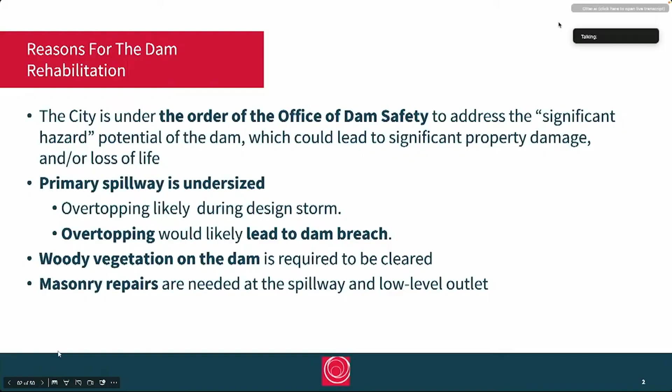I wanted to provide an overview of the dam. It's on Dexter Road—a good chunk of the road is actually the dam. It's an earth embankment dam, about 200 feet long. There's a primary spillway made of a concrete weir with a concrete overflow section that sends water underneath the bridge crossing Dexter Road.

The structure has a concrete core wall in the middle intended to help reduce seepage through the dam. There are also two low-level outlet pipes, 24-inch diameter, that can be used to help drain the pond, usually for maintenance operations.

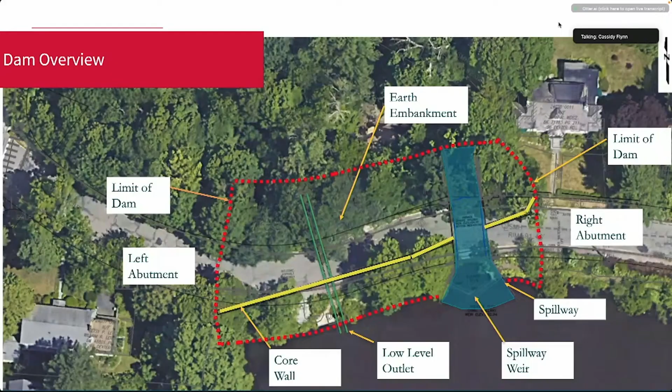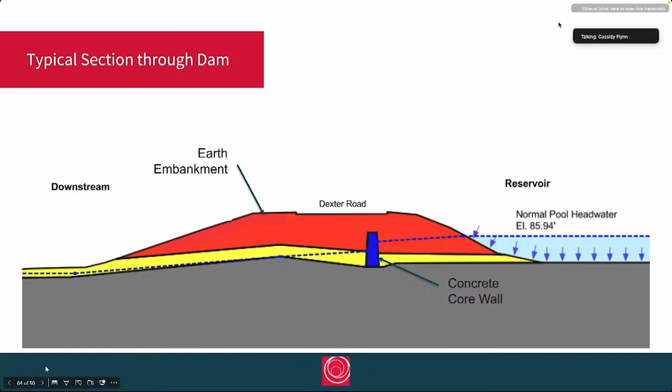It's a cross section through the dam. On the right side is the reservoir, the pond upstream. Most of the dam is the earth embankment section. And then there's that concrete core wall represented in blue, which sits down on top of the bedrock.

And you can see schematically there, it sort of reduces the water that's seeping through the dam. The dam is classified as a significant hazard potential dam. And the state requires that it be able to pass the spillway design flood, which would equal a 100-year storm event.

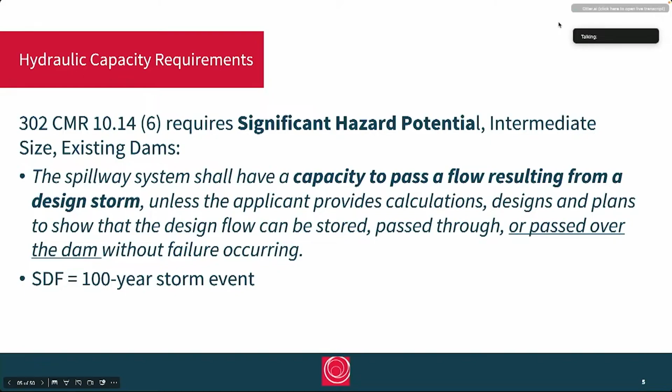We've done a fair amount of looking at the dam evaluations, including starting with hydraulics. We wanted to independently evaluate the hydraulic capacity of the dam. We've developed a hydraulic model to look at how much rainfall we get in the area, how that hits the ground, how it runs into the pond. That's impacted by things like the slope of the surfaces, the type of surfaces, whether or not they're pervious to absorb some of that water or impervious, which would make that water run a little faster. So all of those things get incorporated into our hydraulic model.

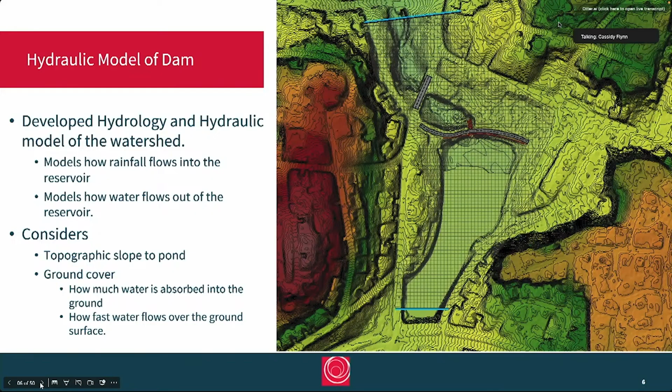The 100-year rainfall based on the data set that's out there is an 8.8-inch rainfall event, which would occur over a 24-hour period of time. That's the requirement the state would have us design this to.

We ran two different models. One was a one-dimensional model, and the second is a two-dimensional model that looks at the topography in more detail. We ran those. The 1D model is a simpler one, and the 2D gets a little more complicated. But in the end, they both showed about the same thing.

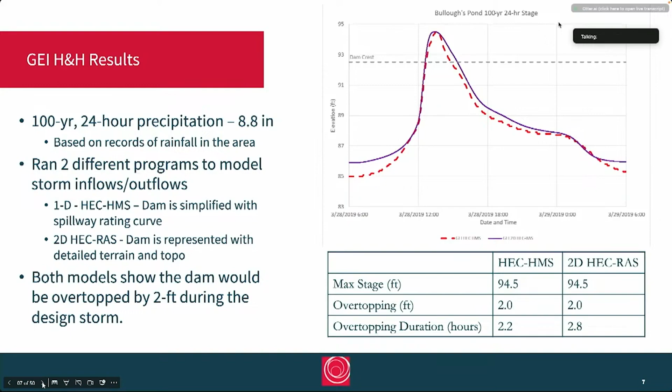So when it overtops, that's a failure mode that we're really concerned with. That's an overtopping failure leading to a breach of a dam, which is really the most frequent cause of a dam failure for earth embankment structures.

So what happens, water comes over the dam, you can see in the top image. Once it starts to come over, if we don't have any hardening of the structure or erosion protection, it starts to move soil particles. The more it moves the soil particles, the more it starts to move more, and it eventually erodes back to reaching the full reservoir upstream.

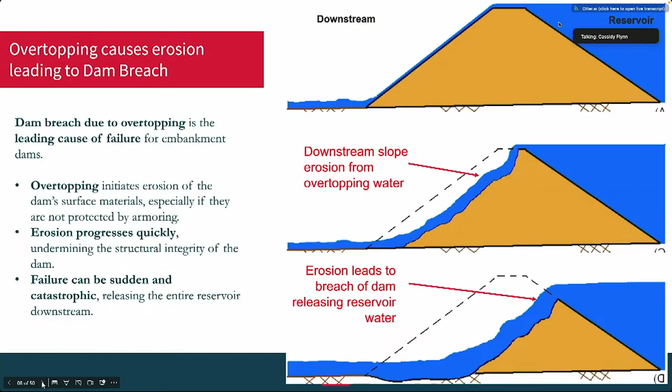And then what happens is we lose the full reservoir. So inclusive then of the water overtopping the dam, we pick up all the water that's in the reservoir that wants to go downstream as well.

So as we went through an alternative evaluation process, our primary goals were to look at: can we increase reservoir storage to help retain this flood? Are there ways we can increase the spillway capacity so we can send more down so the dam itself doesn't overtop? And then lastly, if it does overtop, what are our options to try to resist the erosion and not allow us to breach the dam with an overtopping event that would reach the reservoir?

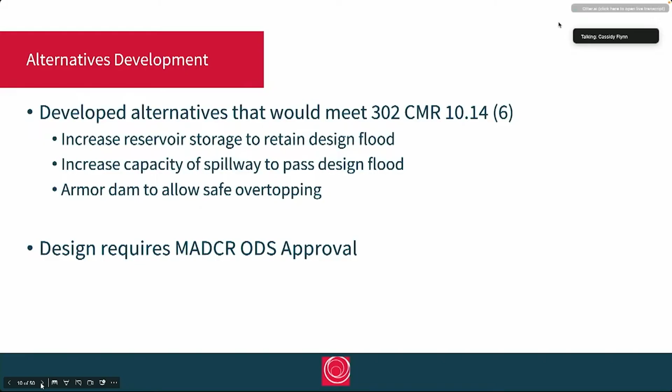With all the alternatives we considered, we did have to keep in mind that at the end, the Office of Dam Safety is going to have to approve any proposed repair. We would have to submit a Chapter 253 dam safety permit, which gives them really the final say to review and agree with the project.

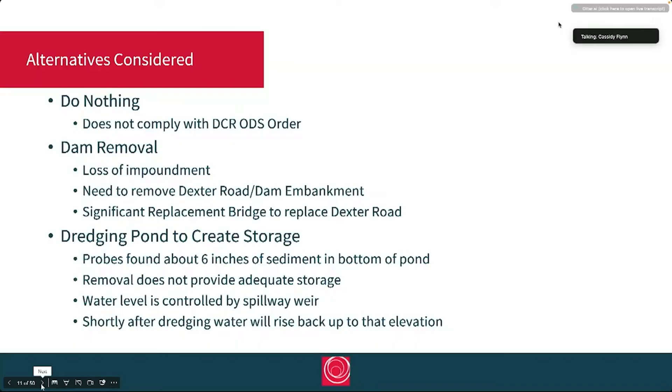We looked at potentially dredging the pond. We did some probing and found there was maybe about 6 inches of sediment. Removing the sediment doesn't really help us pass the design flood. As we take that sediment out, the water level would drop about 6 inches, but there's water always feeding into the pond, and that level is controlled by the weir. So within a few weeks, a month maybe, the water level would be back at the same level, and when the spillway design flood were to happen, we wouldn't have any extra capacity at that point.

We looked at trying to modify, could we use the low level outlets? The Office of Dam Safety doesn't allow manual operations of the low level outlets as an active way to deal with a storm event. They want a passive system that doesn't require human intervention. We talked about potentially preemptively draining the pond in the event of floods, but again they don't accept that as a solution because over time, people stop doing it, so it doesn't work effectively in the long term.

And then we looked at, are there other ways to add different types of low level outlets? The challenge here really is the size of the system needed to pass the flood is significant, and we didn't think it was very viable.

We considered, is there a way to add an auxiliary spillway, another way to get the water around the structure, but due to the site constraints that was going to be a real challenge. There's not a lot of property around, and property taking would be needed for that expansion of the dam footprint. Not very viable.

We considered, could we enlarge the primary spillway? Can we get more flow through that? We looked at whether we could add a larger weir, the length of opening in the spillway where water can flow over. There's a couple ways to do that: one is widening it up into the reservoir, another is using a labyrinth spillway, which has more length and a smaller footprint.

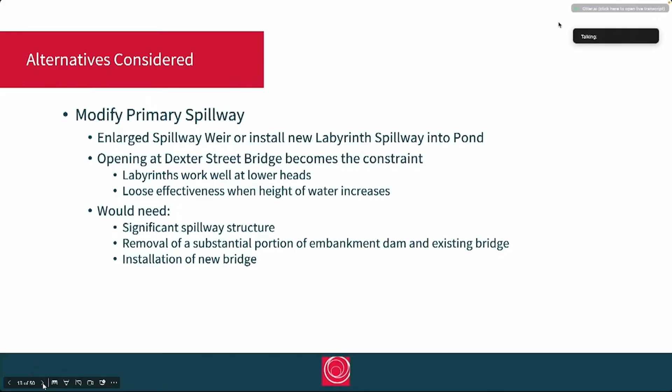So then we came back to the alternatives of reinforcing the dam, so in the event it does overtop, we wouldn't have erosion on the downstream side and wouldn't ultimately cause a potential breach of the dam. There are a few solutions we considered for ways to do that.

Originally we tried to do it in a way we could argue the downstream slope wasn't part of the dam anymore, to keep the trees, but the Office of Dam Safety didn't accept that in our discussions with them. So we have one solution, a sheet pile wall. The second solution is a modified core wall. A third solution is an overtopping protection design. I've got more slides on those, so we'll talk a little more in a few minutes.

And then lastly, we considered whether we could raise the height of the dam to hold back more water. That was challenging with the site constraints. We currently have about 2 to 3 feet of overtopping predicted, so we'd need to raise the dam at least that much.

But once you raise it, the water level goes up because the water keeps rising. At the current elevation only 3 feet of water goes over, but then it relieves itself because it's going over the dam. The more you raise the dam, the more you're trapping water instead of relieving it, so you end up chasing it. I'm estimating we'd have to raise it between 4 and potentially 8 feet, which really impacts the surrounding streets. A number of houses right on the pond would also be impacted with flooding, and adjacent properties on the intersecting streets would need access modifications considered.

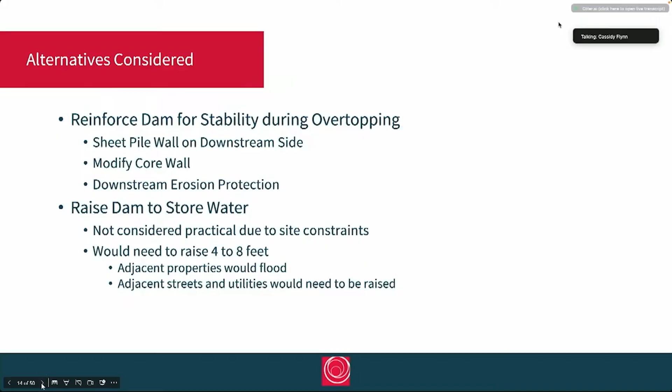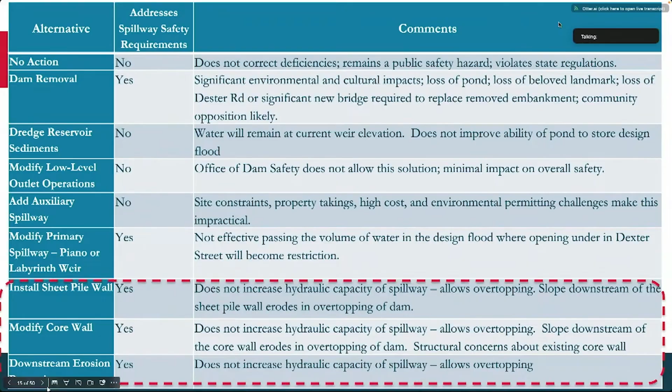We'll go through the embedded sheet pile wall, raising the core wall, and a downstream overtopping slope protection project. We've discussed each with the Office of Dam Safety, and they've indicated they would review any of those options as potentially viable. They'd want more detail and want us to demonstrate how these would be stable during and after an event. In our discussion with them, my feedback was that a couple would be more challenging to prove good stability, but we'll go through those.

The sheet pile gets driven into the ground. It could be cut off so it's buried and you don't see it, and then we'd restore the ground at the top. We'd have to put in these dead man anchors to provide lateral stability to the wall if it has to serve in the capacity we're looking at.

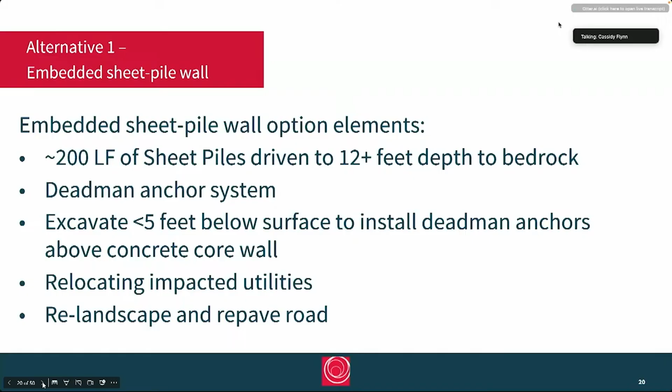The second option we came up with was the raised core wall alternative. It's similar to the sheet pile solution in that we're using it essentially to stop erosion that might happen during the overtopping event at a certain point in the dam, so we don't breach into the full reservoir.

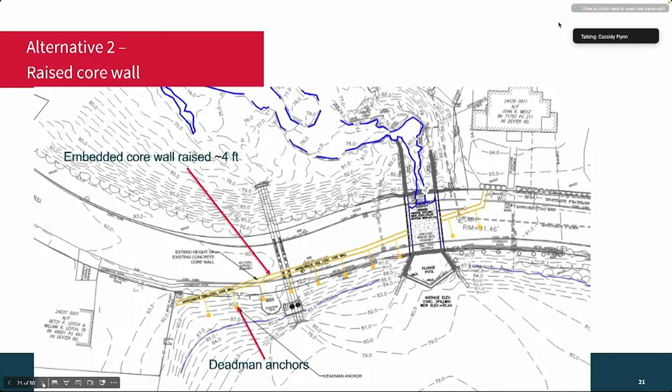That existing core wall, which we believe is unreinforced concrete buried now for about 100 years — if we could extend that, we'd need to make a structural connection into it, extend it higher, and also add a lateral restraint like the dead man system to help.

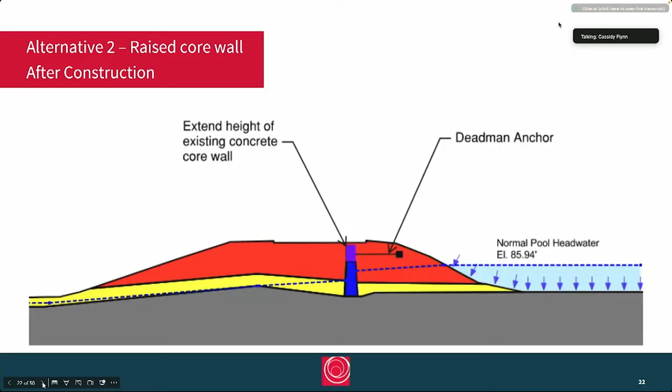That would allow all the material on the downstream side to erode and come back, stopping when it hits the core wall. Then the core wall, for some period of time, essentially becomes the downstream side supporting the dam and the water in the reservoir.

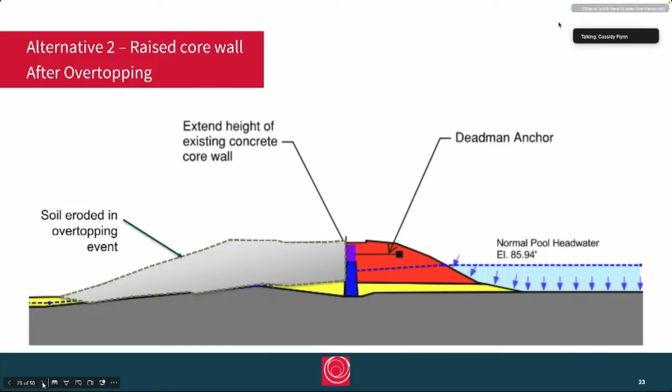This one excavates 5 feet down to the top of the core wall. We need to anchor into it, form concrete up around it, and dig for the deadman system. We will have utility relocation issues and landscape issues to restore.

I think the biggest unknown and uncertainty at this point is the condition of the core wall that's been buried for 100 years. It wasn't designed originally to act as a structural element, so we need to make it one. The risk is if we get out there during construction and find it's not in good condition, where the pivot would be to a much bigger excavation and really a brand new concrete wall.

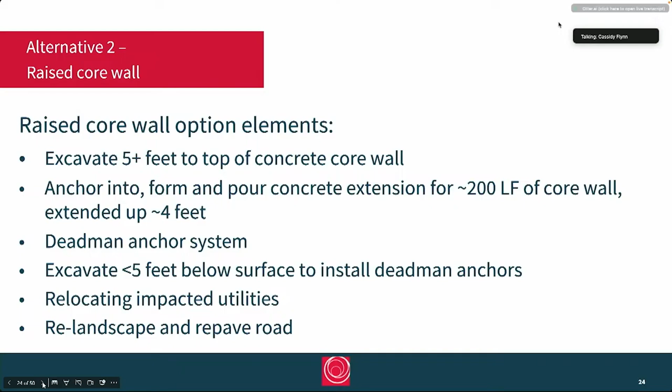Lastly, of these three alternatives, we evaluated downstream slope protection using an articulated concrete block system that can be covered with turf and grass. So that's what you see when you're out there.

This is a much easier excavation. We're really just disturbing the downstream slope of the dam. We'd put down some base materials and then lay these articulated concrete blocks, which I have pictures of in a minute. As the water overtops the dam, we have potential erosion of the topsoil above the articulated concrete block, but we stop the erosion way out on the downstream side of the dam versus the other two alternatives we just talked about.

This one has tree removal like the other two. We've got to strip and put in some of these articulated concrete blocks and fills to give us a nice leveling surface. Once those are in place, we'd cover them with topsoil and seeding.

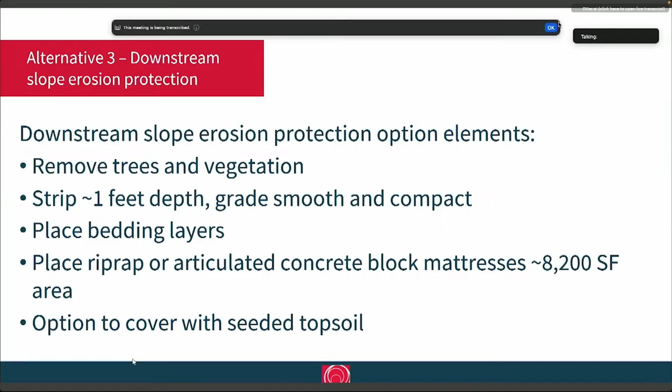Another example of one that was constructed. At the end, you see the concrete blocks on the left image, and on the right image is after they've put topsoil and seed over the top of them, so you don't see them underneath the ground.

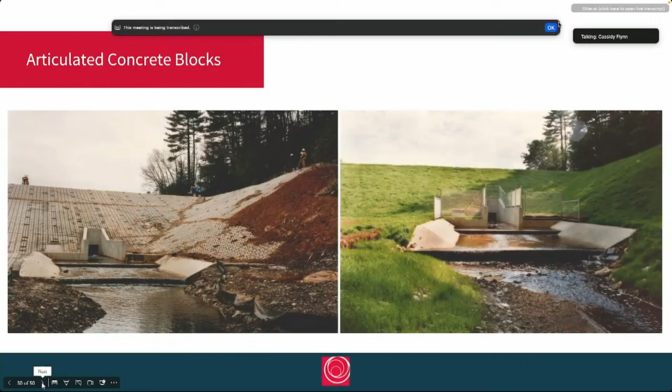We've talked a little bit about overtopping and breaching, so I want to go through those for a minute. On the left, you see the start of an overtopping event, with water starting to come up and over the dam. Overtopping itself, if we can protect the dam from eroding, we're letting the water pass over, which it currently would do in its current condition. Our estimate right now is that we'd have about 400 cubic feet per second overtopping the dam in both the current condition and our proposed solution.

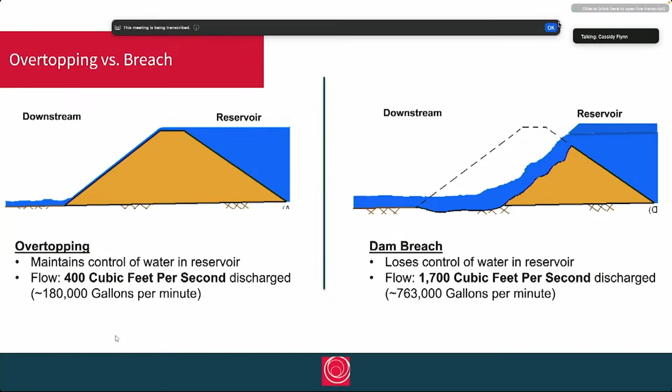Go to the next slide. This is a slightly larger footprint you see. If we allow the breach to occur, that area expands somewhat and the flooding levels go up to about 2.5 or so feet.

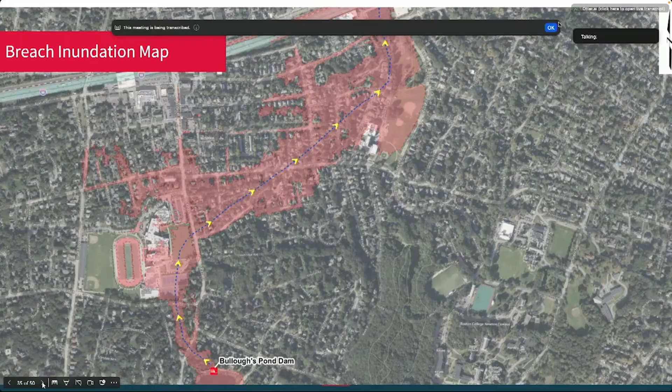Each of these alternatives require tree and vegetation removal to comply with the ODS order. We've tried to talk with them on where we could save trees, where we would have to cut them no matter what. Alternatives 1 and 2, we will need to remove a total of 172 trees. For alternative 3, we'd have to remove about 199 trees.

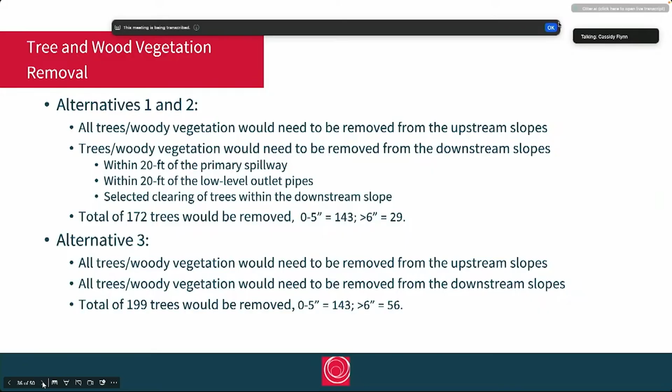City's Parks and Rec staff went through and started to develop some restoration planning where they could plant some trees or do some other landscaping improvements as part of this project. Their ideas would be to add some benches and seated areas in different areas around the pond and at the dam. They'd look for some no-mow type turfs that they could plant to make the area look appealing.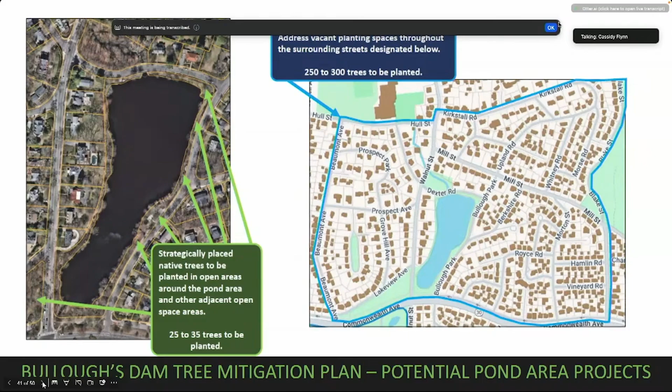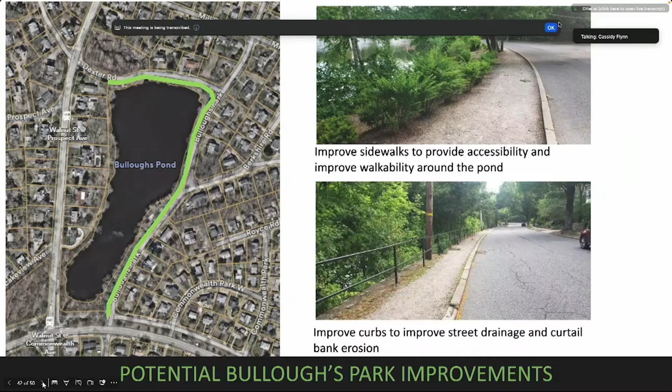It also includes some repairs to sidewalks and some curbs that might help some erosion in some locations going down towards the pond, as well as removing some invasive species and enhancing some of the bank areas.

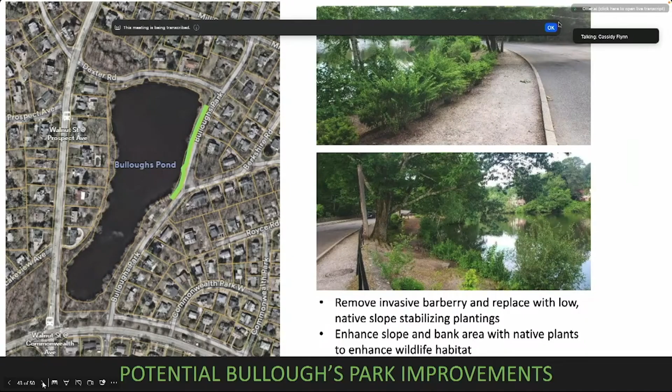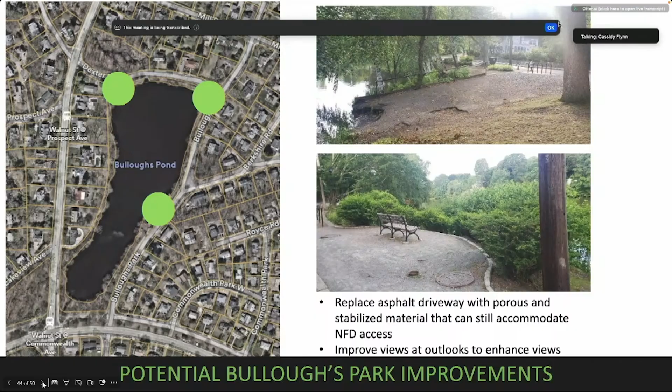And then I think they'd like to add a couple of little pocket parks, seating areas, and then repair there's an access road down into the pond, a boat launch that I think the fire department uses. And there's the location of a pocket park that they're considering.

So as we consider the three options, it's our recommendation that we consider option 3. I think the benefits to option 3 is it's effective for dam safety and for protecting the dam with minimal erosion for the long-term performance of the system. It has the least impact on the road, on the neighborhood right there than the other two.

It stops that scour right at the toe of the structure, as opposed to letting that scour work its way back to either the sheet pile wall or a new core wall, which would require for the long term the city to go back in then and do repairs if one of those events were to occur. Office of Dam Safety has seen this solution and they've used it themselves. They've approved other projects that use that type of solution.

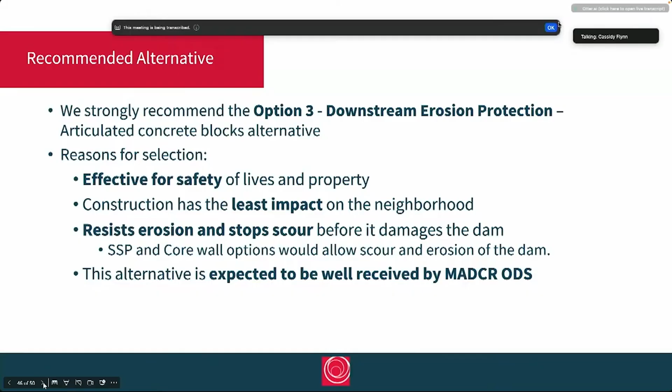There are risks with option 1 and 2. Can we demonstrate stability of the sheet pile wall? Will we get good rock embedment? Those are unknowns. Similar with option 2 with the core wall. Is the condition of the concrete going to be in good shape? Are we going to get out there and come back and say this project went from X to add $8 million to it because we need a massive change to make it functional? Those are things that make me, as the engineer, less certain. I think that has a lot of risk to it. So that's why I think option 3 is a preferential solution.

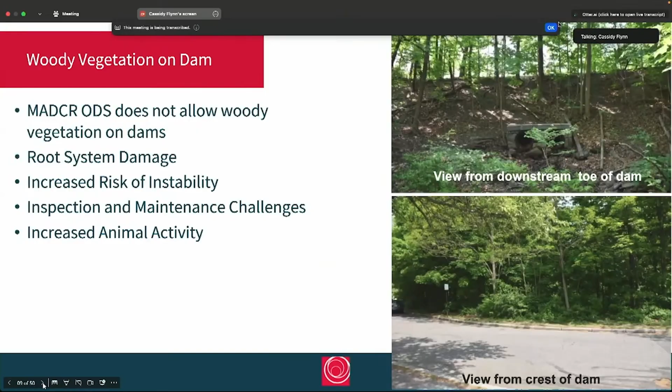I guess when you say that they wouldn't accept that, is there any going back and forth? There's no discussion, they just say we don't accept it and that's it. We had them come to the site, walk it with us. We had a formal meeting with them. They won't provide any formal response until we submit a Chapter 253 permit. So there's no official word because their job is to be open-minded until they get something in front of them to formally review it. Okay, so they just don't like the idea.

All right, thank you. So Nick. Yeah, thank you, Chair. Before I get to questions, I just want to take a step back and share some perspective with the broader council, from those who might not have been part of all the discussions on this.

First, a thank you to the Bullough's Pond Association for all their work helping to educate the public on this issue and advocating, and making sure this place is a great spot for all. I think the goal of all of us is to minimize the damage to the natural environment and to maximize safety for residents, and to do both those things together.

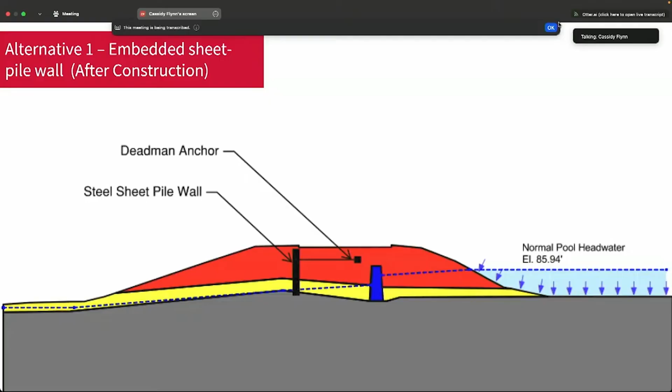If you look at the maps you showed, I think it's on slides 34 and 35, that show the difference between an overtopping event and a dam breach event, I think it highlights pretty clearly that both scenarios are catastrophic. And there's more numbers in a map you shared with us in a previous meeting, where the breakdown is bad in both. So on Harvard Street, for example, the depth above roadway in just an overtopping event, which is what the proposed solution would allow, is 1.7 feet.

In a breach event, 2.4 feet. Both are catastrophic, both are bad. The breach is clearly worse, but to me both need to be mitigated. On Newtonville Ave, the difference is even closer: 1.1 feet in an overtopping event, 1.6 feet in a breach event.

So to me, if we go forward with a solution that does damage the natural environment but does not protect residents from any catastrophic scenario, we're taking something away from residents without serving them, and thus we're failing them. So I think that's where I start philosophically in terms of our responsibility.

And then I think about the state mandate, this idea that we're mandated by the state, we need to do it. That may be true, but I think the responsibility of local government is to engage in dialogue with state legislators, with state mandates. And we've seen in the past that strategy yields better results, even with a recent example with the MBTA Communities Act.

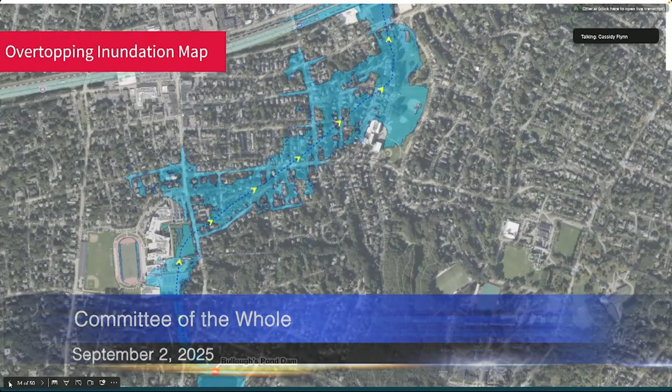And what it costs to fix the problem of a major catastrophe is unbelievable to me. I believe in climate change, and I think this is going to happen. My question is, are these three proposed remedies, which all of you professionals agree will allow for an overtopping between 1 and 2 feet of water, that will create this scenario? Is there nothing else, including the pumps that Councilor Mickley refers to, or other situations, where we might have to spend $20 million to protect those homes and businesses and the high school and the roads and the infrastructure? Because we're all going to pay for this anyway. This is going to happen. I agree with you completely. This is going to happen, unfortunately.

I wish that the majority of people in Washington agreed with that and would give us all some money to help fix this problem. But I just don't understand why these are the only three options where we say, yep, it's going to happen. And I would like to see financial modeling for what this costs. And I believe we can do that.

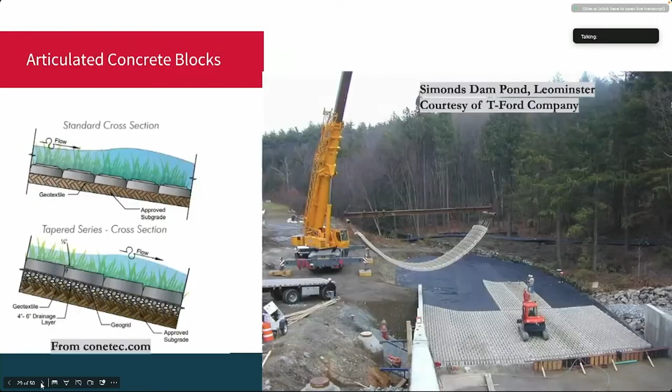I think there was a slide that said something between 29 and 53, something like that. I think it's that one, yeah.

When did you [ask]... When were you brought on to do your work initially? We started in 2022. Was there another company beforehand? And do you know what happened to their work?

There was a previous company the city was engaged with before. I think the way the RFP went out on the street for public bidding, it was posed as a new set of eyes to have a different consideration.

And Commissioner Sullivan, when was the relationship with the prior company terminated? 2021. And you came on board, what, 2023? 2022. So there was a gap of about a year or so between the two entities? I wouldn't say it was quite a year, it was about 6 months. We engaged GEI in February. And was there some reason for the delay from when you were brought on board to when you came before us for the first time?

No, there was just work that we were doing, working with the city. We had a number of meetings. We met with the Bullough's Pond Association, some of their leadership a few times, just as part of that process.

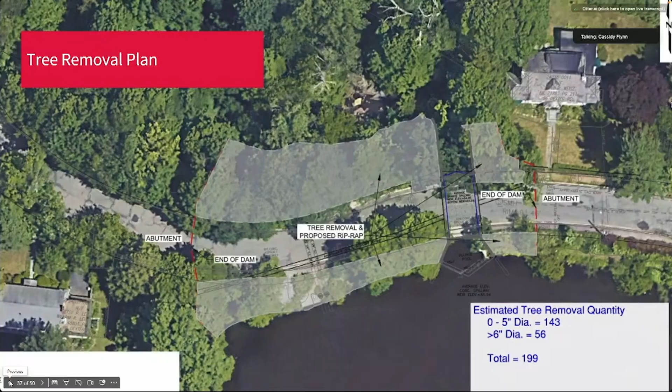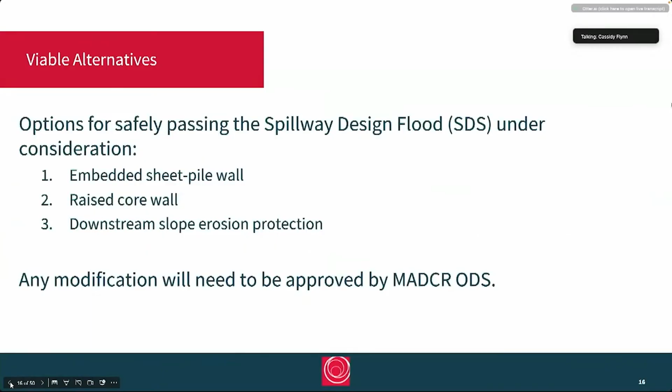Okay, well, thank you. Let's see, can you just, Ms. Flynn, can you go to slide 12, please? I have, there was something that was shared, I just want to go over it again. Number 12. There we go. What does MADCR stand for? Massachusetts Department of Conservation and Recreation, sorry. I just know it as DCR, I never see it as MADCR, putting in extra letters.

So they are indicating that they would not approve a preemptive drawdown operation or manual operations. I think that's what Councillor Mickley was implying - is that right? Nodding his head, yes. Thank you, Councillor Mickley. So it says they indicated, but I don't think we've heard that from them directly.

And I would like to know why or why not. What is wrong with bringing the water level down so that when we do get that 100-year storm, the pond is lower and it won't overtop and it won't cause erosion. It won't breach. What is wrong just with that idea? Forget the Office of Dam Safety for a second - what is wrong with that concept?

When I say they indicated, they specifically told us they wouldn't when we met with them. The reason is because we'd need to rely on forecasts. So the forecast says it's going to rain tomorrow, so we send the DPW department out there and we drain the pond, and then we get half an inch of rain and it isn't an issue. Happens again 3 months later, happens again 6 months later, happens again a year later. Pretty soon, people stop doing it - it doesn't look like it's a big deal. Operationally, we're left with a drawn-down pond, and it takes time to restore the water back into it.

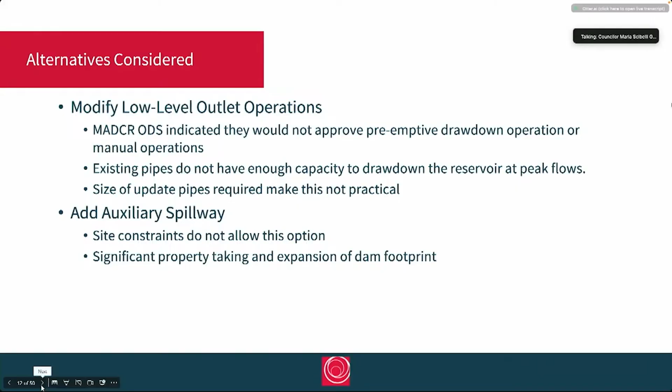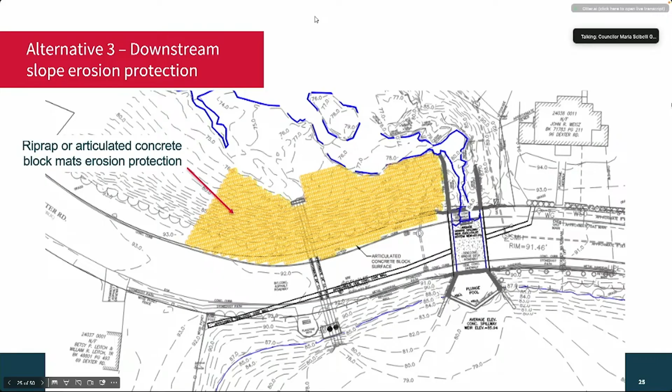Okay, so that articulated concrete, will trees be allowed to grow on top of that? And if not, how will they be prevented from growing on top of that? They would not be allowed anywhere on the dam structure itself or within 20 feet of the dam structure, the slopes, the toe of the dam. There would have to be a grassed turf that would have to be mowed a couple times a year.

Oh, so that would be grass turf like a lawn. And if any stray tree would start to grow, that would have to be removed. Correct. And the city would maintain that. Yes. And would this be an open area for recreation? Would there be benches on there or anything like that? Part of the Parks and Recs group, as they were imagining some restoration work, had proposed some potential benches and areas for recreation. Okay, that's my questions. Thank you.

Councilor Oliver. Great, thank you. So I'll start by saying I'm not an engineer. I don't play one on TV and I don't want to. Way over my head in many of these cases, but I do want to pause and say thank you again for all the information that you presented tonight. You answered a lot of the questions that I had. All this conversation is really interesting to me.

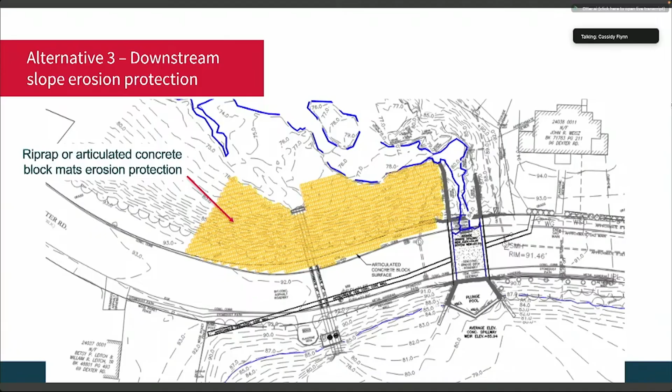I do have one question, and I think it builds off of what I've heard from Councilors Mickley and Laredo. And if there's a better way to phrase this, any of the engineers here, please rephrase it. I'm just going to put it out there. If there were no Office of Dam Safety, and you knew that you had identified the same challenge that they did with this dam, would you have designed any of the 9 options that are in these materials? And I don't necessarily want an answer to that yet, but I do want to know, is any one of those solutions the full solution that you would put forward, that you would feel is the right thing to do in its entirety? I think you're asking about all 9 options, put them on the table. Or maybe is there a 10th option? Do you understand what I'm trying to get at? My question might be a little off, but I am curious.

I think I still end up at the option, the overtopping protection design with option alternative 3, as the solution. I think it gives you the most robust solution to protect the dam. And I am focused on the dam because I do think that's a more immediate threat than the downstream flooding, because it makes it worse.

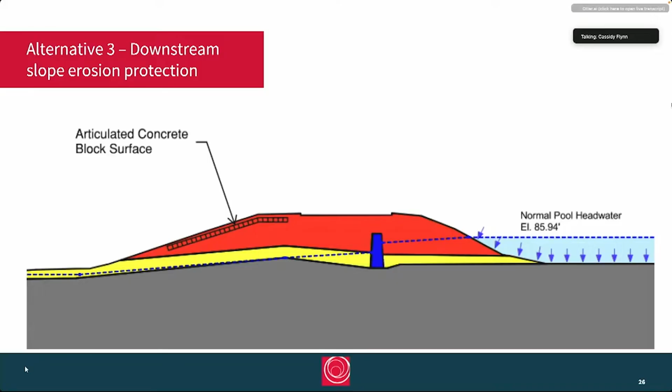So I had some questions for Mr. Nickerson. The more I look at this, the more questions I think of, and I realized there were a couple things I wasn't sure about. On your inundation maps, whether it's breach or overtopping, I'm assuming the water level, projected water levels and so forth in the inundation maps include the rainfall that's falling downstream of the dam.

It's not just the water that's coming from the dam? It is just - thank you, I'll get used to this at some point - it is just the inundation from the dam water itself. It does not include rainfall water.

So it doesn't include the effect of it raining downstream from the dam too? That is correct. So whatever water levels you're projecting from the effect of 8.8 inches in 24 hours from overtopping or breach, you'd have to add the effect of 8.8 inches falling in Newtonville itself. Yes. Do you have any idea what order of magnitude that would change the heights? I don't.

I am very concerned, as others have said, about the overtopping scenario. We did not actually know what the overtopping scenario would look like until our July 28th meeting, because all we had seen up till then was the breach map. I asked about it, and Councilor Mickley asked about it at the April meeting, and we thought we'd get it at the June meeting, but we didn't. Councilor Mickley asked again, and then we got it at the July meeting.

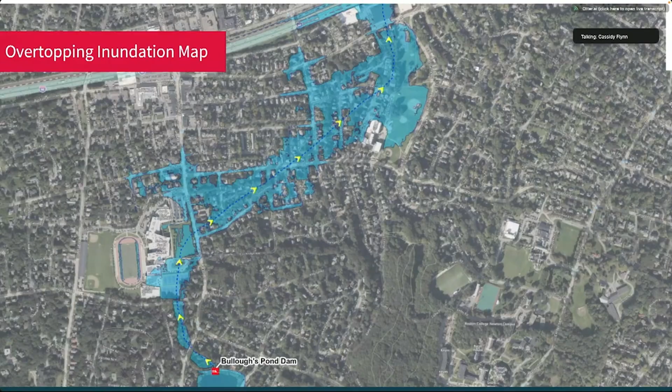Yeah, so these are, I think, similar. Many of the options we've talked through, between adding additional weir length, using systems like automated gates to control things, I think we still get pinched by the restrictions of the site without substantially removing much of Dexter Road.